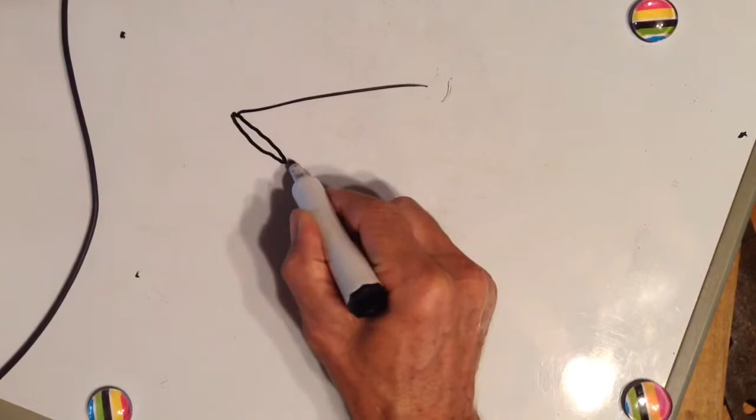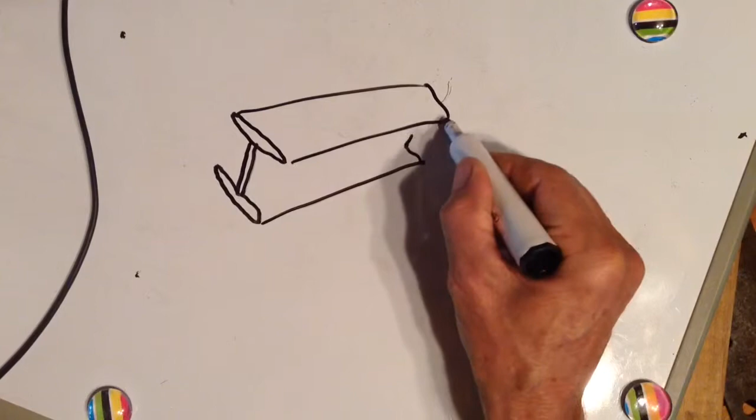Shear. In this lesson we're going to talk about web shear. First off, we need to find out what a web is. If you have an I-beam, here's the top flange, here's the web, and here's a bottom flange. So this part right there would be the web.

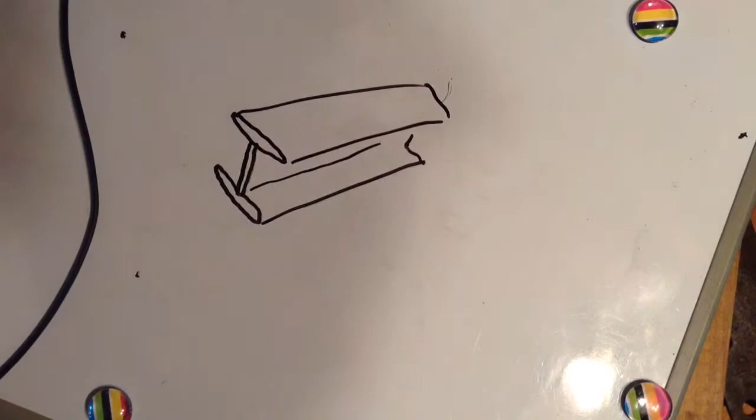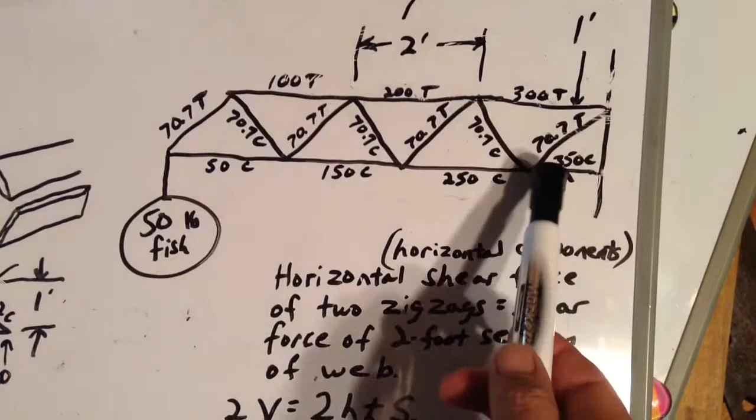In our previous lessons we talked about trusses with zigzags. Here's one. Let's say this is a fishing truss as opposed to a fishing pole. We have a 50-pound fish hanging from the end of it here.

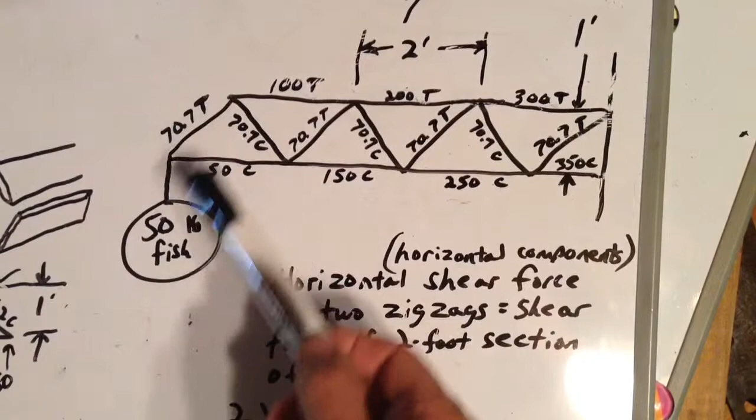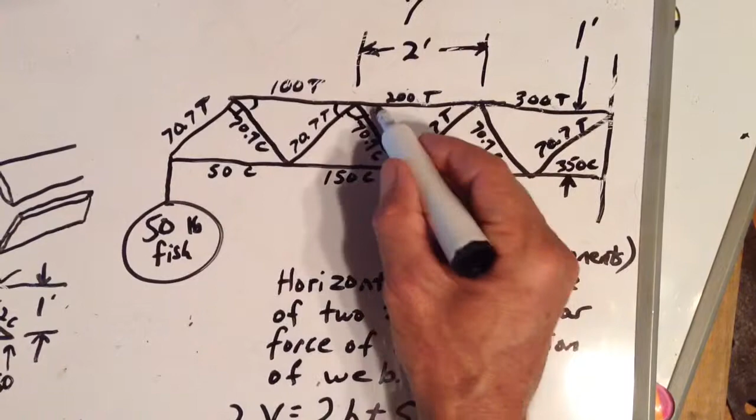So at this point, this zigzag is in tension. It's having to hold this point up because the fish is trying to pull it down. Okay, let's say these are all 90-degree angles right there. That's a 45, that's a 45, a 45, a 90, a 45, a 90. In other words, we have a bunch of 45-degree right triangles here.

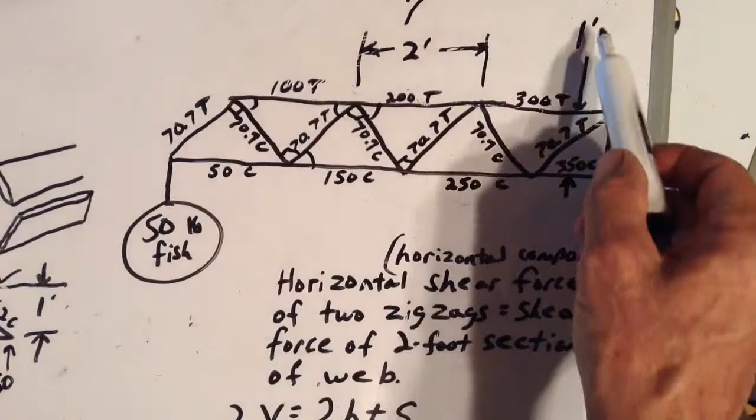Let's say our truss from top to bottom is 1 foot high. So that means it's 1 foot from there to there. And with this dotted line, we just turn this 45-degree right triangle into two smaller 45-degree right triangles. So if that 1 foot there is equal to this 1 foot here, that's a leg, this is another leg of this 45-degree right triangle. So from here to here is 2 feet.

So we have our truss here, our zigzag, pulling 50 times the square root of 2 pounds because the ratio of our sides of a 45-degree right triangle are 1 to 1 to the square root of 2. Then 50 times square root of 2 is 70.7.

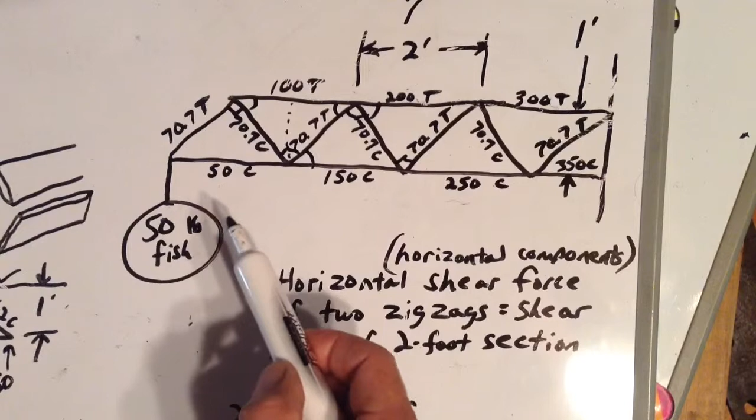So that's in tension, which means it's pulling this point down and to the left. Well, this zigzag has to be in compression because its vertical component cancels out the vertical component of this tension member. This one's pulling down and to the left. This one is pushing up and to the left. The up from this one balances out the down from this one, but they're both moving, trying to hold this point to the left. They're forcing it to the left.

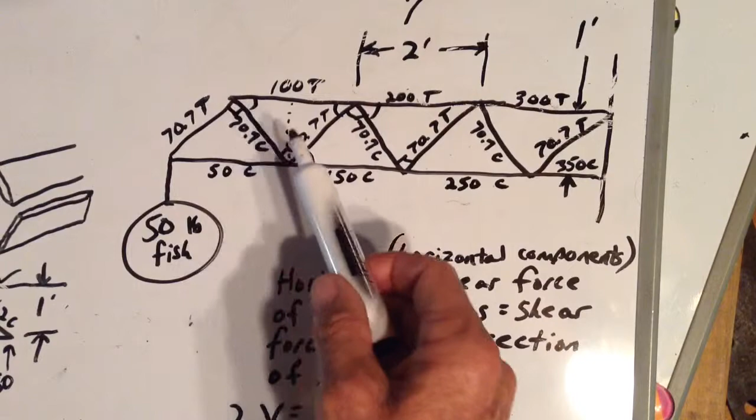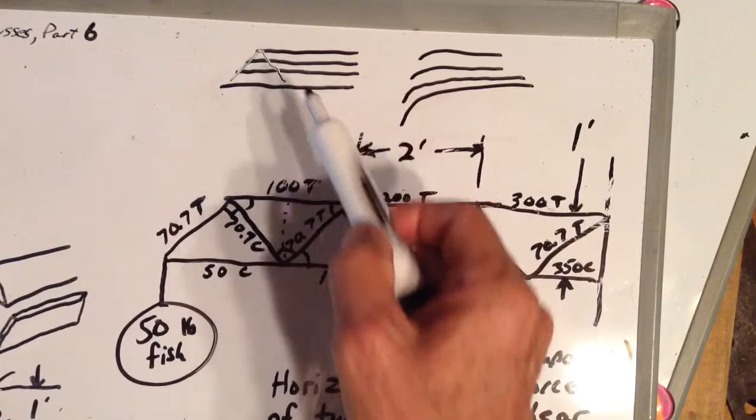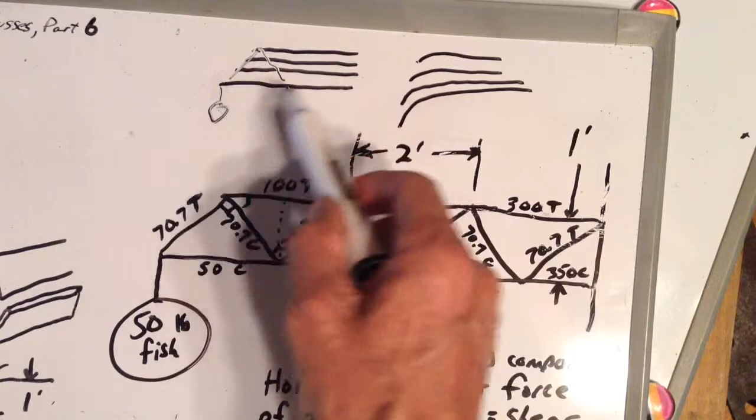As we can see, if this truss were a stack of paper, like so, and we didn't have our tension member here, or our compression member here, and this fish was hanging from here, it would pull it down like this. This would become further away from this. This would become closer to this because this tension member would let it get further away, and this compression member would allow it to get closer together.

Okay, we have 2 feet between here and there. Every 2 feet we have another pair of zigzags touching our top flange. Remember the name of this lesson? It's web shear. We looked at the web of an I-beam at first, and we're going to look at how a web takes the place of the zigzags of a truss.

So these zigzags, this zigzag here is in 70.7 pounds of tension. In other words, it's pulling this point down 50 pounds, it's pulling it to the left 50 pounds. This one's pushing this point up 50 pounds, pushing it to the left 50 pounds. The ups and the downs cancel out. So the net result is that at this point, this pair of zigzags is holding this top flange to the left 100 pounds. These zigzags are doing the same.

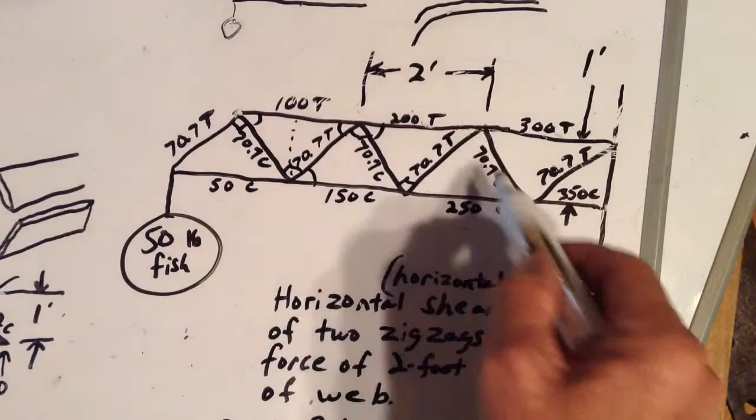We're assuming this is a weightless beam, and the only weight here we have is the fish. Of course, that's not the way it works in real life. All beams in real life do have weight, which means that these zigzags would become under greater loads as we go further and further this way.

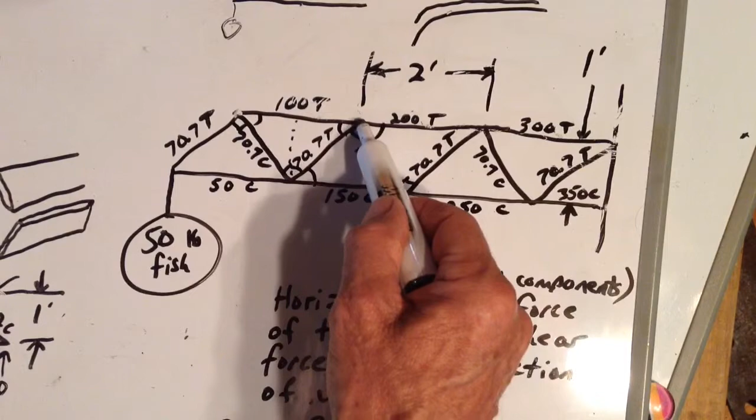Okay, so we have 100 pounds pushing this top flange at that point, another 100 pounds pushing it to the left at this point, another 100 pounds pushing it to the left at this point. In other words, every 2 feet we have 100 pounds.

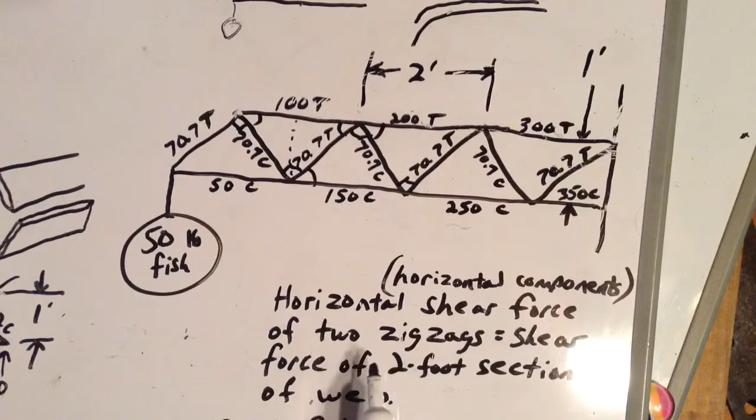So we can come up with a formula for web shear, because we can say that the horizontal shear force of 2 zigzags, or the horizontal components of these 2 zigzags, which is 100 pounds, equals the shear force of a 2-foot section of a web if we were to replace these zigzags with a web.

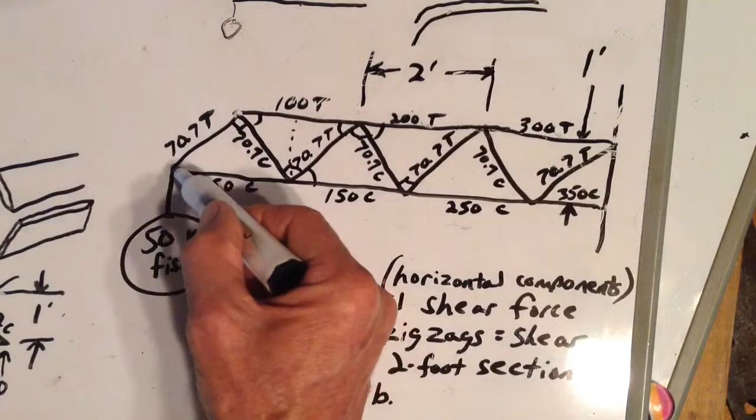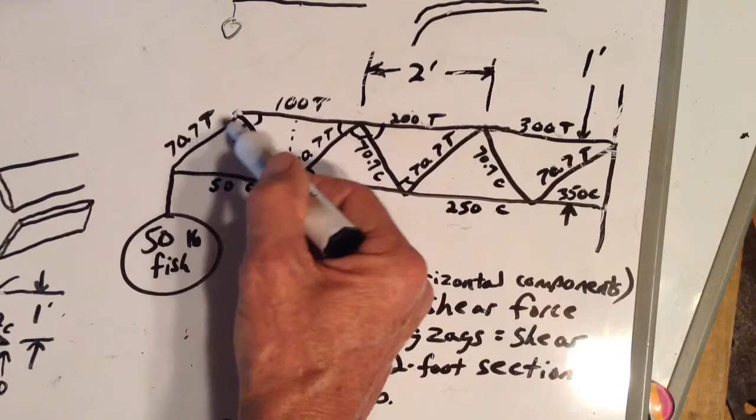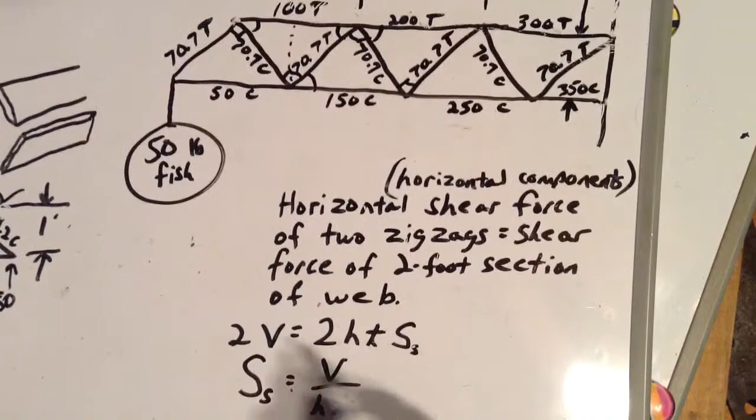So what is the horizontal shear force of the 2 zigzags? Well, it's this 50-pound weight of the fish gives you a 50-pound horizontal component, which is why this zigzag has a 50-pound horizontal component, and this one too. So 2 times the vertical shear, which is what this fish is causing. 2V, 2 times vertical shear, is the force here.

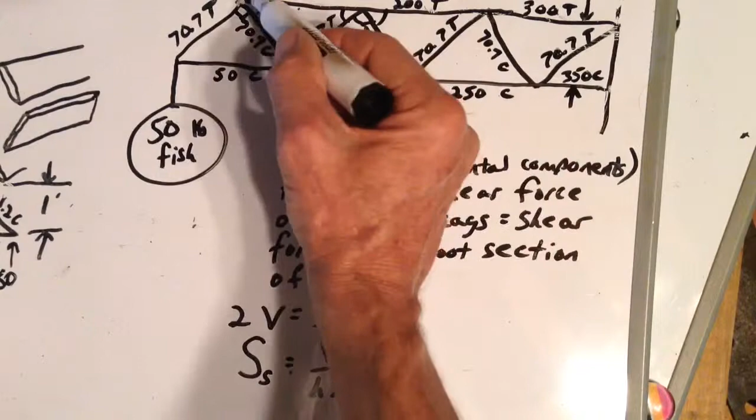It's equal to 2 times, well, here's the height of our beam. We call it 1 foot. We could call it H if we want. But whatever we call it, from here to here is twice as much. So if we call it H instead of 1 foot, well then it's 2H from here to here. So 2H, that distance, times T, the thickness of our web.

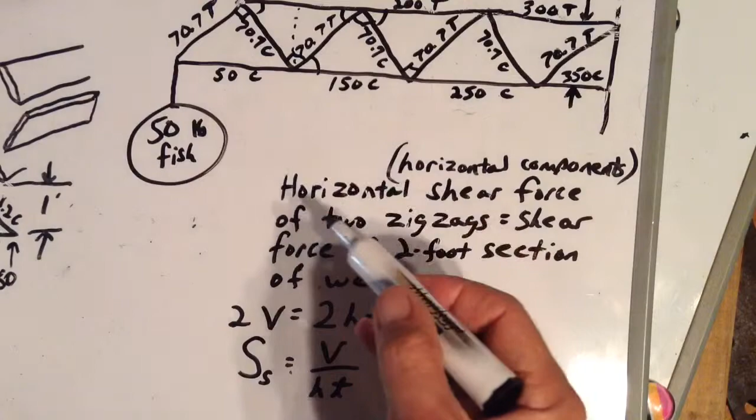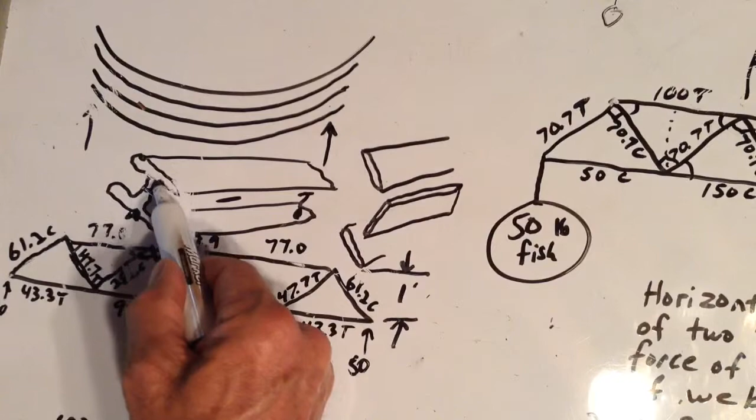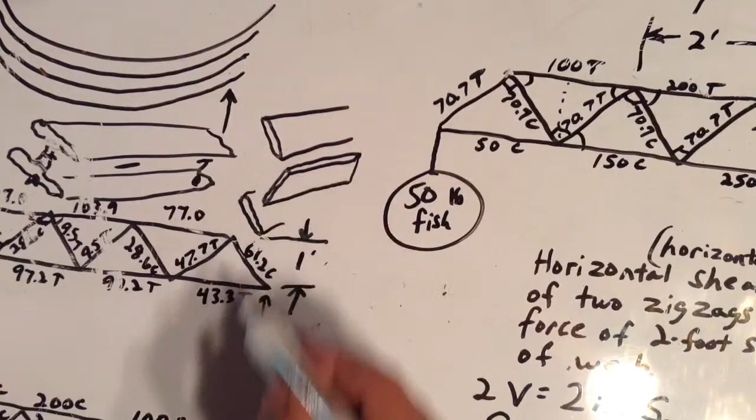Remember our web, here was an I-beam we looked at in a lesson or 2 ago. If we were to cut it right there, cut the web off from the top flange, cut the web off from the bottom flange, it would look like this. There's the top flange, there's the bottom flange, there's the web. Okay, so right along in here, that'd be the area where the web connects to the top flange, right underneath there.

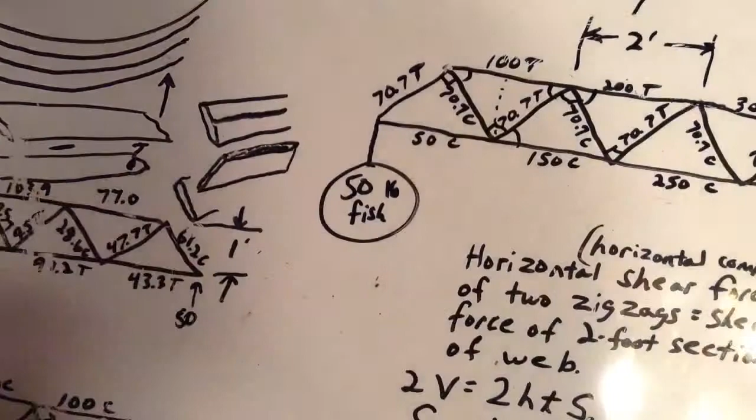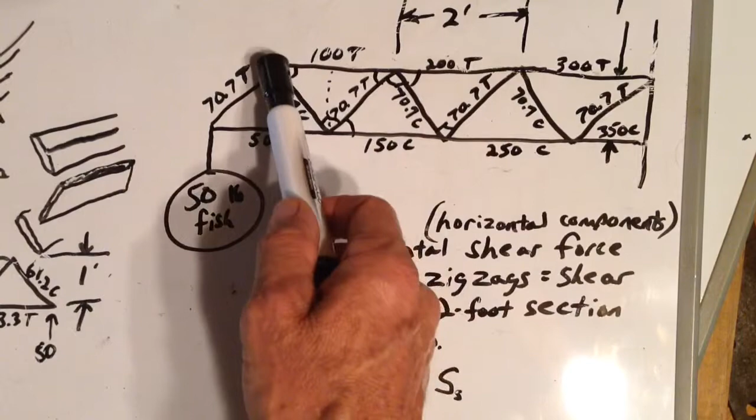So this area of our web between here and there, times the stress in that area, will give us a force which is equal to the force that these 2 zigzags are pulling on this point. That much force for every that distance.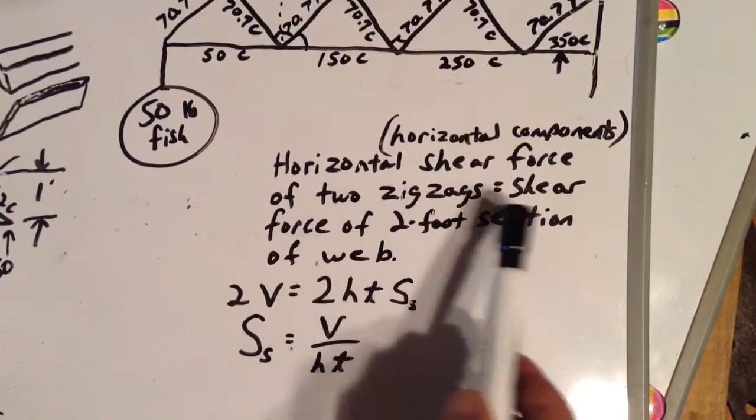So getting back to our formula here, horizontal shear force of 2 zigzags is 2 times the vertical shear force, in this case 2 times the weight of our fish plus the weight of our beam, which we're calling weightless in this example. The horizontal shear force of these 2 zigzags, 2V, equals the area of our web along here from one connection to the next, which is 2H times T, times the stress, the shear stress in our web.

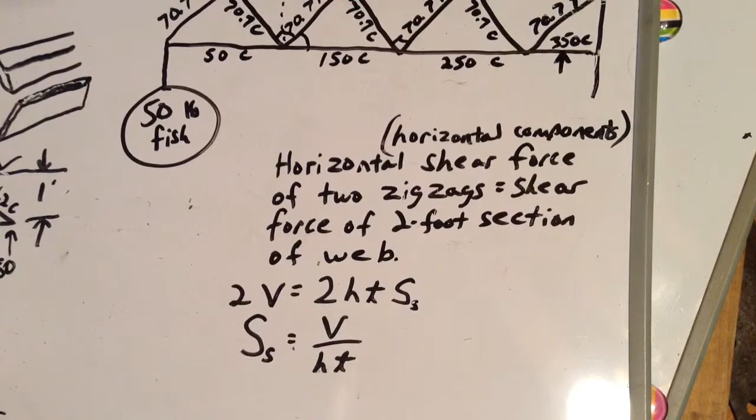We can divide each side of the equation by 2 and we get rid of them. We can divide each side by H times T. We end up with shear stress equals the vertical shear divided by the thickness of the web times the height of the beam. That's how we figure shear stress in a web.

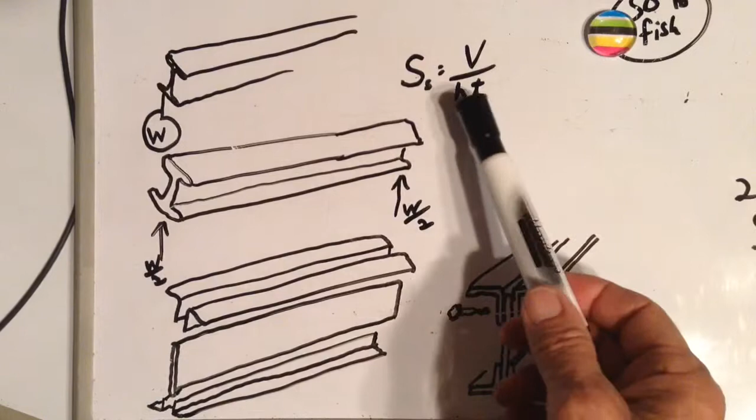We determine that the web shear stress, the stress in the web of our I-beam, is equal to the vertical shear force divided by the height of the web or the beam, doesn't really matter which one, they're both about the same, times the thickness of the web.

So here we have an I-beam. Let's say it's resting on a stand on this end and resting on a stand on this end. Let's say this I-beam has a weight equal to W. So the force here would be W over 2, and the force on this end would also be W over 2. So the shear force at this point would be W over 2.

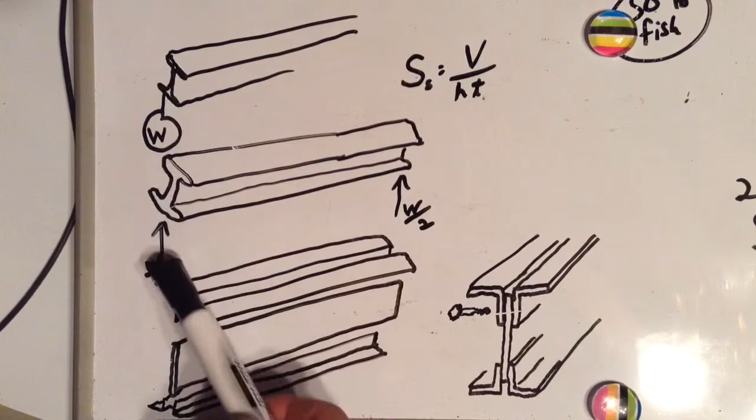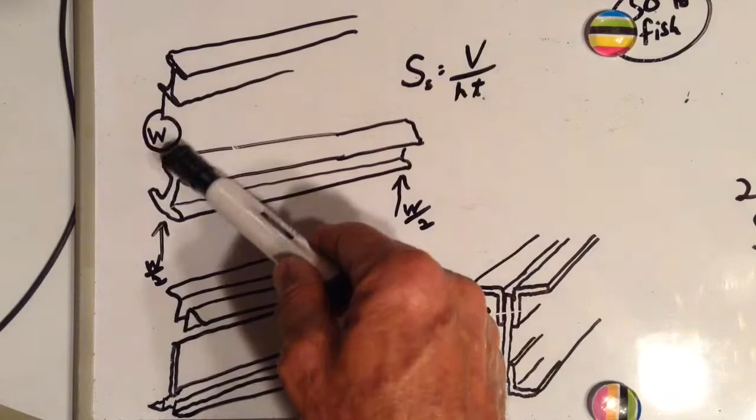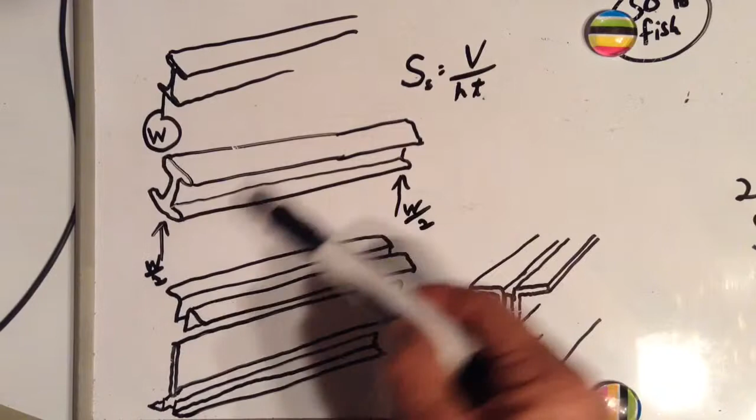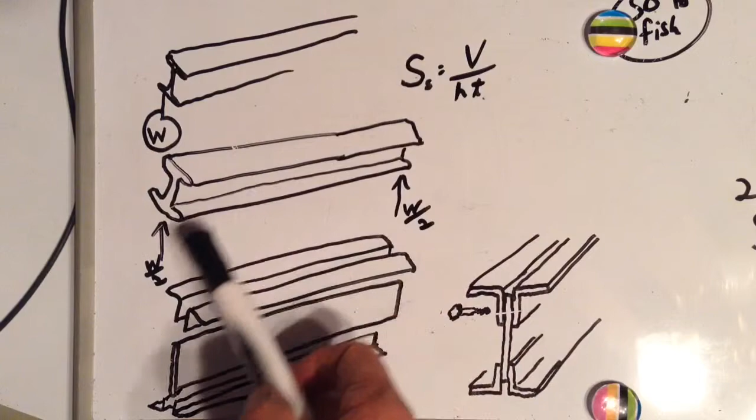But as we move along this way, our shear force equals the force pushing up here minus the weight between here and wherever we're measuring our vertical shear force. So halfway across the beam, the vertical shear force is going to be W over 2 minus W over 2, because the weight of this whole thing is W, and the weight of half of it is W over 2. So at this halfway point, the vertical shear force is W over 2 minus W over 2, which is 0, just like in our stack of paper that we were lifting with 2 bridge supports.

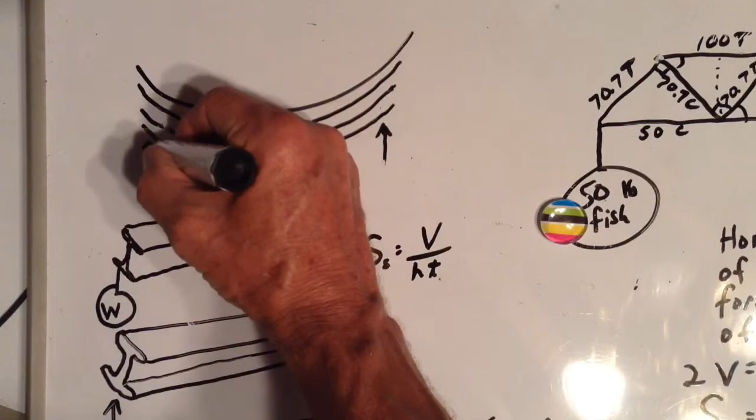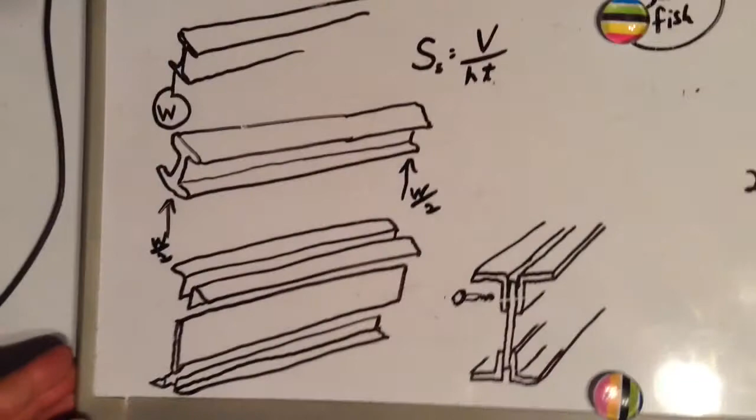We have shear stress here on the ends, but no shear stress in the middle. Our I-beam right here is similar, no web shear in the center of it. But let's say we have another I-beam here, kind of like this one. Let's say this one is identical to this one, same length, same weight.

Let's say we tie a rope around this and hang it from here on the end of it, so we have a load of W hanging off the end here. That's what this weighed, we called it W. It may be 100 pounds, maybe 1,000, we don't care, we're just going to call it W. Well, the vertical shear force at this point will be W.

The vertical shear force halfway between here and the end - let's say this is going into a wall or something, holding it in place, where the weight between here and the wall is the same as the weight of this one. Well, halfway between here and the end, our vertical shear force is going to be the W hanging from there plus 1/2 W, because between here and there the weight of this beam is 1/2 W.

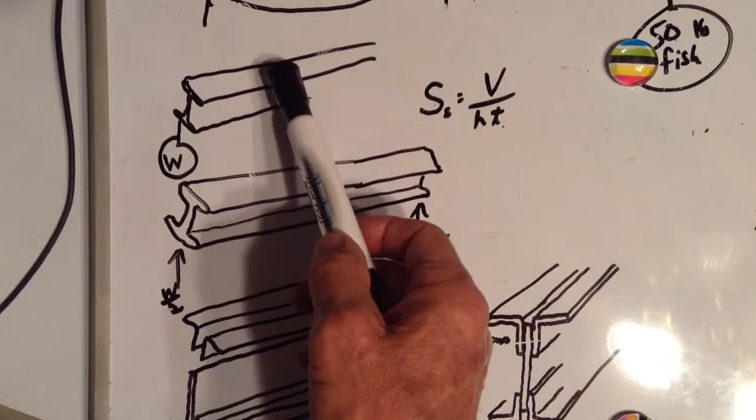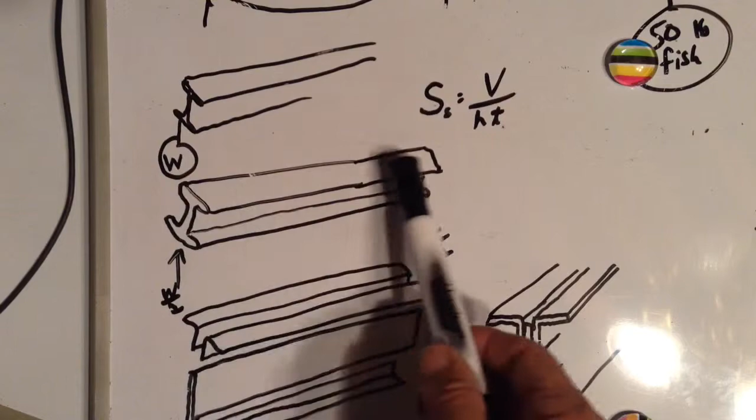So it would be 1.5 W, which means the vertical shear, or the web shear, at this point would be 3 times what it was on the end of this beam sitting on 2 stands, which means the web shear stress would also be 3 times as much, assuming we have the web with the same height and thickness all the way down.

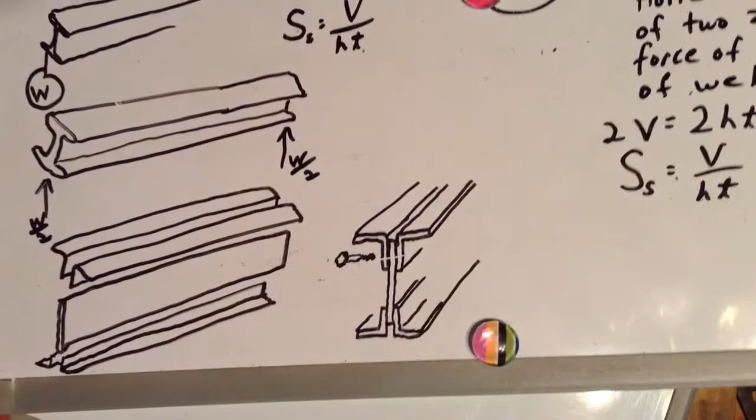Okay, let's say we wanted to build our own beam out of angle iron, angle aluminum, angle fiberglass. We're not really talking about materials in this lesson, we're talking about determining the loads on certain segments. Let's say here's a piece of angle iron, here's a piece of angle iron, and here's a flat sheet in between them, with another piece of angle iron on the bottom, another one there - 4 pieces of angle iron and 1 flat sheet.

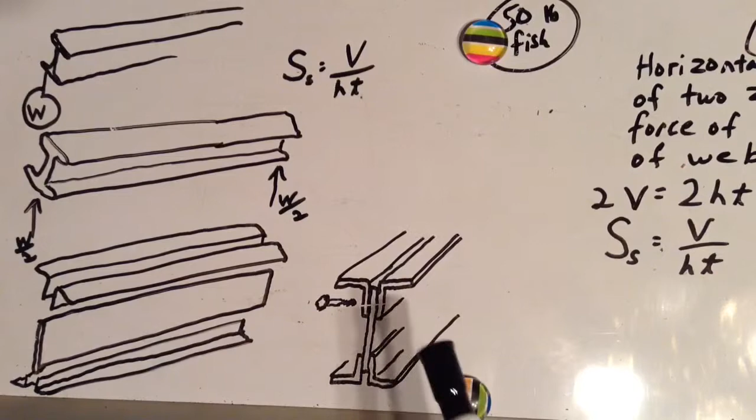And we're just going to drill holes through here and put bolts through it. Call them bolts, rivets, whatever - we'll talk about rivets in a future lesson. But right now, let's try to figure out how many rivets we would need in this.

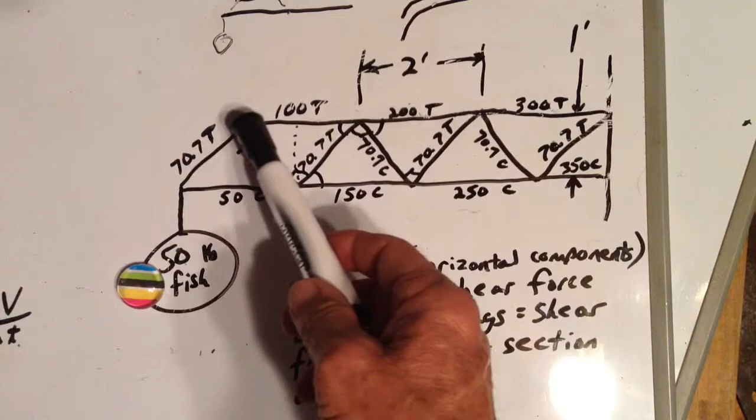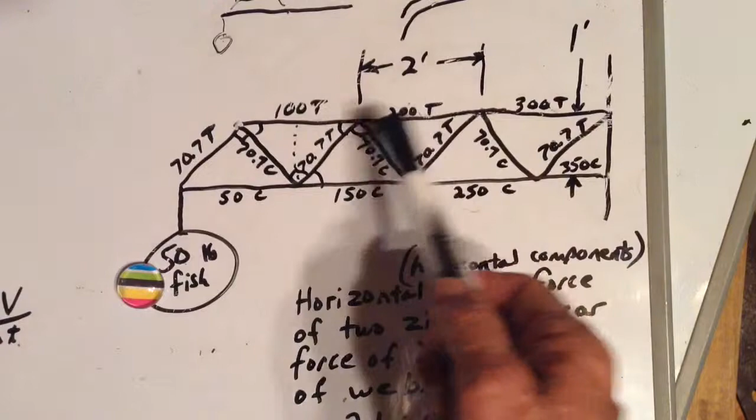Let's say we're talking about the same configuration we talked about a while ago with this truss, remember our 50-pound fish hanging from it? Our web shear was 100 pounds here, another 100 pounds here, another 100 pounds here. Every 2 feet along the top flange, we had 100 pounds of shear added to it, between our zigzags and our top flange.

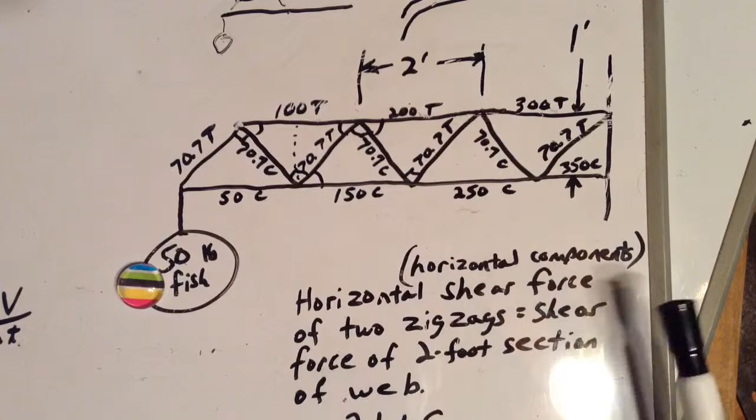In this case, it would be between our web and our top flange. So if we have to withstand 100 pounds every 2 feet, and one rivet can handle, let's say, 50 pounds, well, we would need 2 rivets every 2 feet, or 1 rivet per foot. It doesn't sound like much, but then a 50-pound load isn't much either.